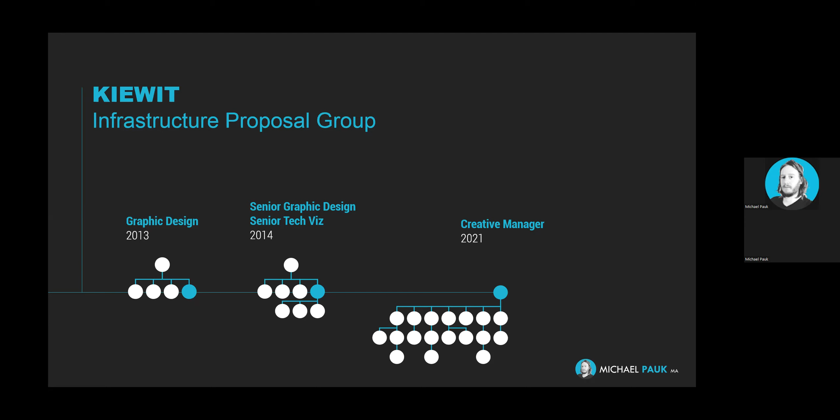And that ultimately grew to about a 16 to 20 person team. Usually it kind of fluctuated a little bit, but pretty healthy for, I would say, almost 10 years we were running this group. It's still going. But that's a little bit of my background. And this time last year, Angie reached out to me and I started contracting with her. And she asked me here to talk today, which I'm excited to do.

And we're going to focus on graphics and tech viz. But I think most of you know what graphic design is. So I'm going to focus on technical visualization, or as we came to call it, tech viz. And in my mind, that's really focused on 2D, 3D, and 4D visualizations of design and construction, which I think separates this stuff apart from what your proposal group graphic designer typically does in terms of layouts and infographics, org charts, that sort of stuff. This is more about the technical representation of the AEC space.

And I'm going to try and not get too nerdy about the technical stuff and keep it focused on proposals and presentations and marketing as per this group. So where these ideas started out, where we started selling this internally, was really what I have come to call garnish on a proposal. We were making these really slick, beautiful representations of the finished design, the finished product of what the proposal was selling. And by garnish, I mean we were really just putting it on covers, tabs, decorating, making the piece that we were submitting beautiful with the product that we're selling.

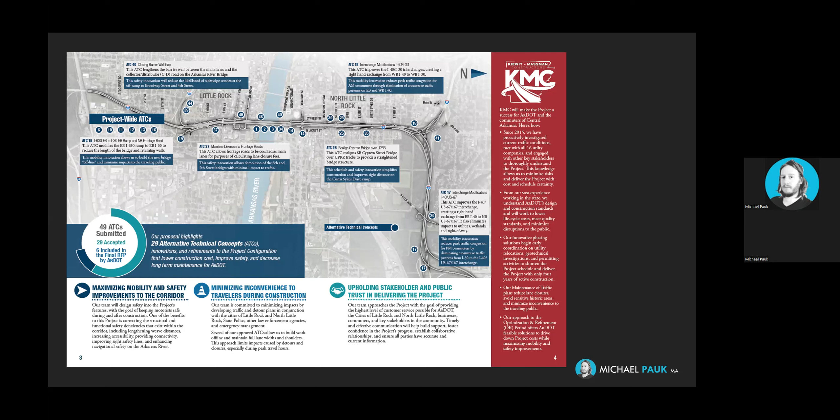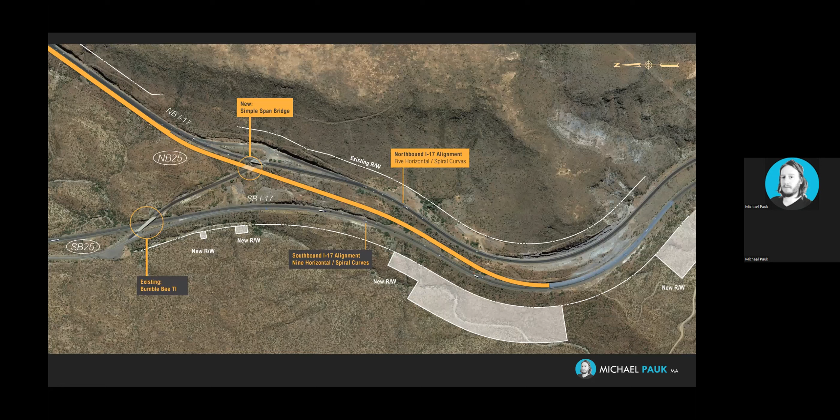And this got more sophisticated over time, where we're starting to use this stuff in executive summaries with really higher class, higher end technical drawings, as opposed to submitting your chicken scratch engineered drawings that we all see every day. Taking that a step further, we started using this tool not just as the communication of design, but also presenting options, exploring the ability to show a client that our design teams are flexible in studying projects and coming up with solutions for the client.

So here we were showing multiple design solutions for the same challenge of building this path in a really super difficult building space, a really small footprint between this cliff and a river, and showing the client what that looks like in the real world. And it doesn't always have to be super complex and big. I like to say that there's no project too big, no project too small for tech viz.

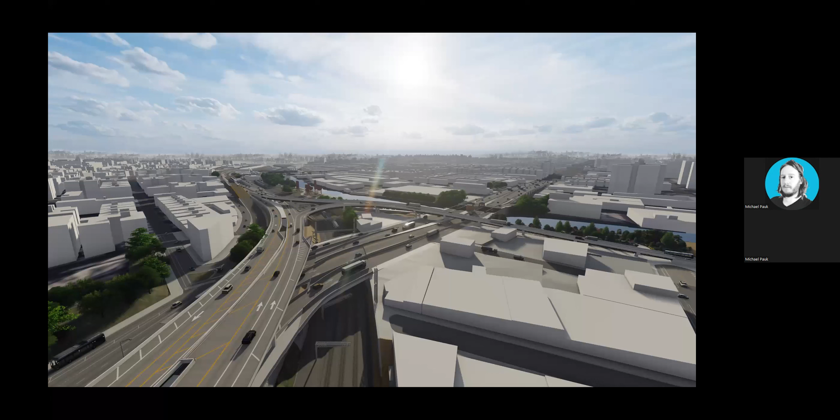If we just want to go in and show the client that we are minimizing environmental impacts on a hillside for a bike path. And then all the way to huge, heavy civil working interchanges in dense urban areas. So this whole process is super scalable. And we also started building things in 4D. This one's not 4D, but we started building animations where we can show traffic moving, what it's like to move through these finished corridors. And I apologize if video is a little choppy over Zoom, because there's a few more.

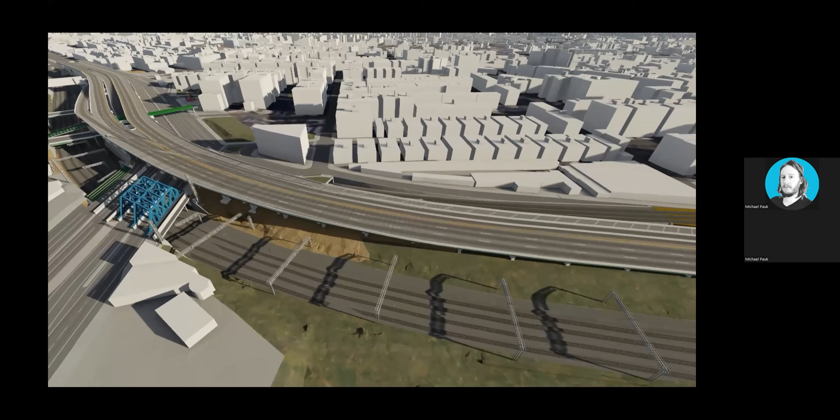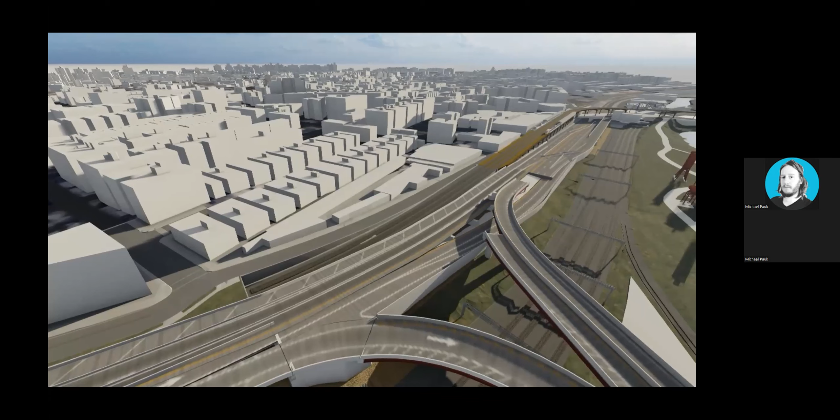So all I've really shown you so far has to do with design, and where we started to maximize our team even further, especially in the CMGC space and the design-build space, is the construction aspect, which gets us into 4D animations of how projects are built out, which requires a mindset that's super in line with your SMEs on the design side and the estimating side to really match these things up with not just the schedule for all intents and purposes, but also to show and bring out the solutions in the schedule that we can take and sell to the client.

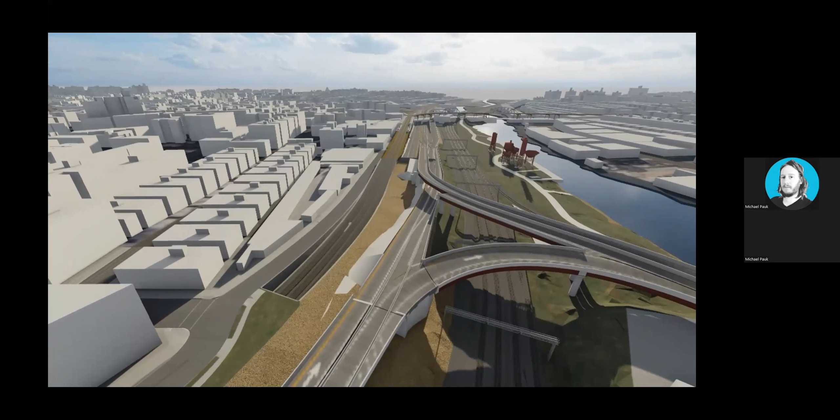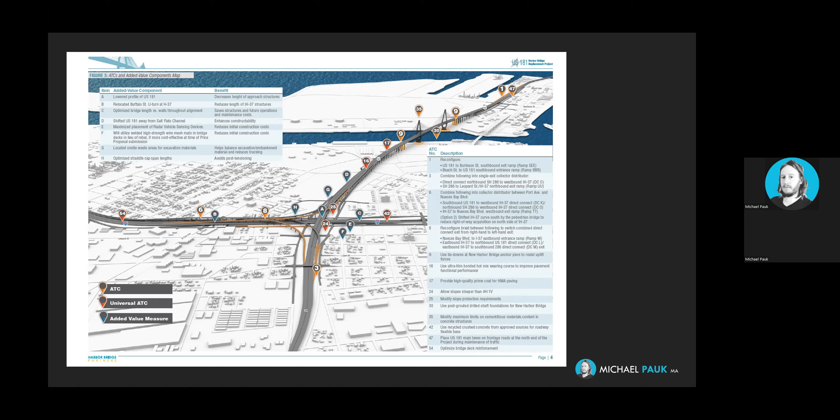And pieces like this were used in interviews and one-on-ones with the client to really communicate our solutions. So again, this graphic was showing TechViz being used to show design solutions, but in the same breath, we can use that same material to show how things are built, not only using a 4D animation, but also using them in a proposal in print media. So when I say this stuff is scalable, we also consult on what we can use, what we can do, and what we can achieve in the space for us.

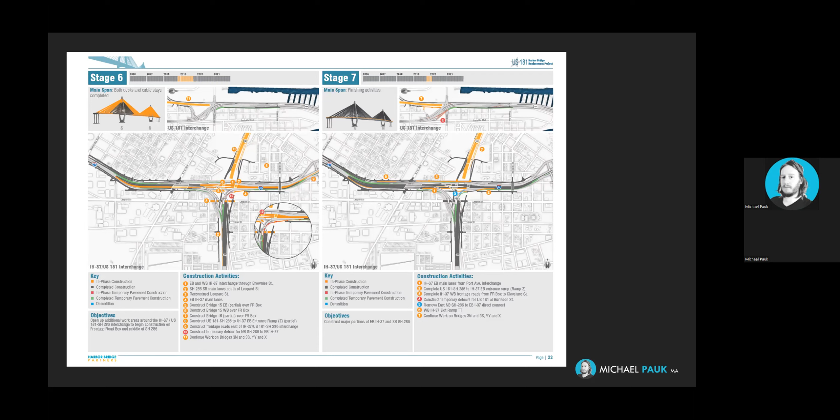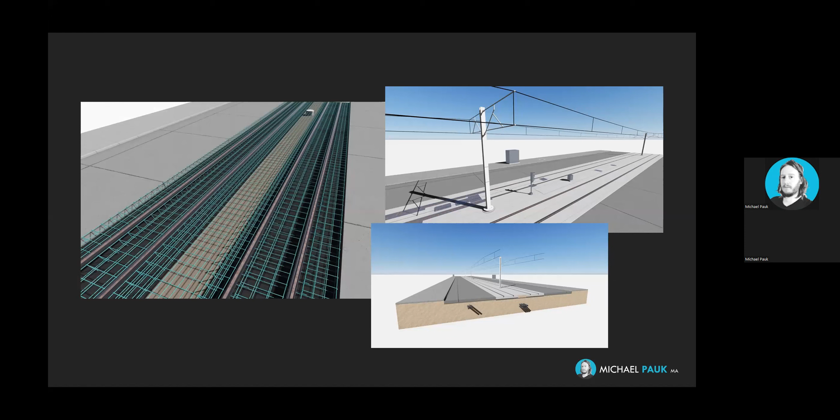We also started building models to demonstrate design components and constructability, showing pieces of projects that don't necessarily need to be in a real environment. We're just demonstrating to the client that we know how to build this, we know what components go in there, and we can walk them through every step of the job. And that builds confidence in our design teams. It helps our engineers and estimators, et cetera, really walk into an interview with confidence and have the ammunition to really sell the project.

So in terms of this group, I think there are a few people on the list I saw that are graphic designers like myself, but there's also a lot of content creators, probably looking at technical proposals. So I wanted to summarize what we look for when we go in and essentially audit a project and identify places where we can use TechViz to enhance that submission.

So on the design side, I won't get too much into these, but we're talking about, again, showing off the finished delivered project, selling project enhancements, demonstrating components and schematics and aesthetics. We started seeing about 5 or 6 years ago more and more aesthetics sections showing up in these heavy civil design-build proposals. So we started really leaning on aesthetics there, and environmental impacts are huge.

From the construction side, we start talking about delivery means and methods. Angie and I just worked on this enormous, crazy CMGC project where the win or lose on the project was demonstrating that we knew how to build this in really complex ways. So we were able to add value there.

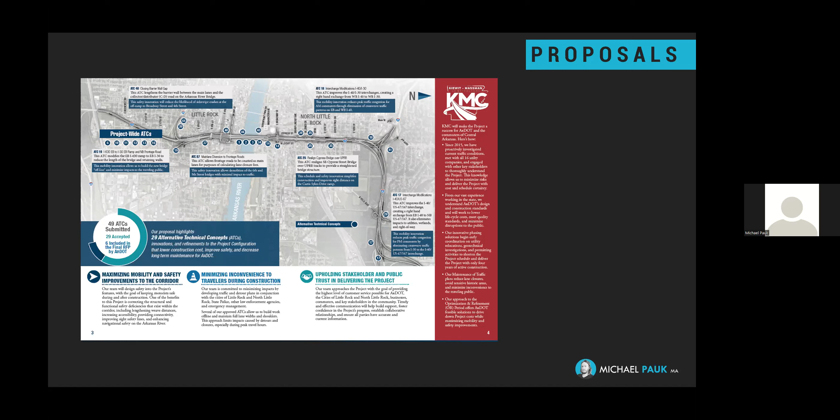But then I always like to give the reader a little bit of a break in terms of content from the heavy TechViz stuff to go back to what are your selling points, what are your messages. And this spread was then the transition into the tech proposal where we get back into tech graphics. So I also pride myself in having been working in technical proposals for 10 years and knowing what's needed.

We know how much space is needed for the write-up and how dense things can be and how we can work with the space of the print media, which is lately becoming more of a PDF digital submission, but for all intents and purposes, the space utilization is the same. And I could talk for hours on end on how to use these in a graphic.

I'm seeing what size font for this. Yeah, I don't remember. Most of the time we have an 11 or 12 point font for body text, sometimes as low as 9 on the graphics.

Sorry, I just got into that question. Where was I? Oh, all good there, Mike.

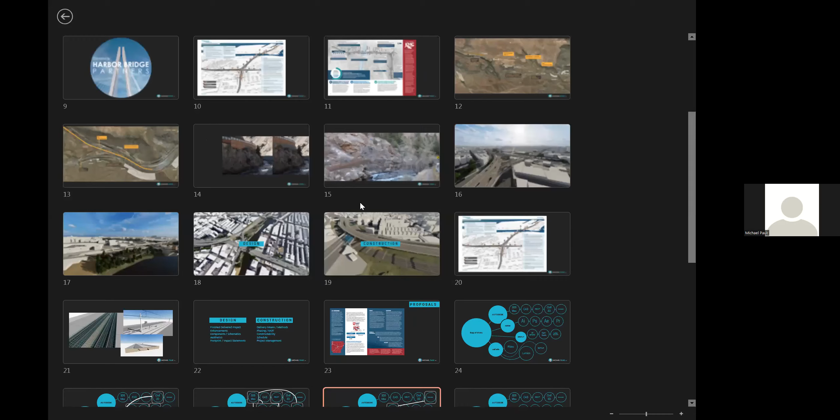I think that workflow we just talked about has a lot to do with those 2D graphics that I've shown, where it's bringing CAD into Illustrator to clean up and make it readable for a lay person to understand these technical drawings. What is your advice there, Mike, on taking these CAD files and creating 2D graphics, whether it's technical graphics, org charts, process graphics, and still making sure that people can understand them? Any thoughts on what to keep and what not to keep on these 2D visualizations?

Yeah. First thing I always say is the delete key is your best friend. Because drawing design and schematics from the engineering side, you're drawing for measurements and quantities. For instance, a graphic like this, that is not what we are demonstrating. So 90% of what I see in an engineering document or a drawing set isn't needed for the space of proposals, selling design ideas.

So delete key is your best friend. I use this analogy from Jack White from the White Stripes, who was talking about music and how he used to work as an upholsterer's apprentice. One of his main jobs was stapling upholstery in place so the upholsterer could work with it. And he would contemplate how many staples were necessary for the upholsterer to do his job, and he always tried to use as few as possible.

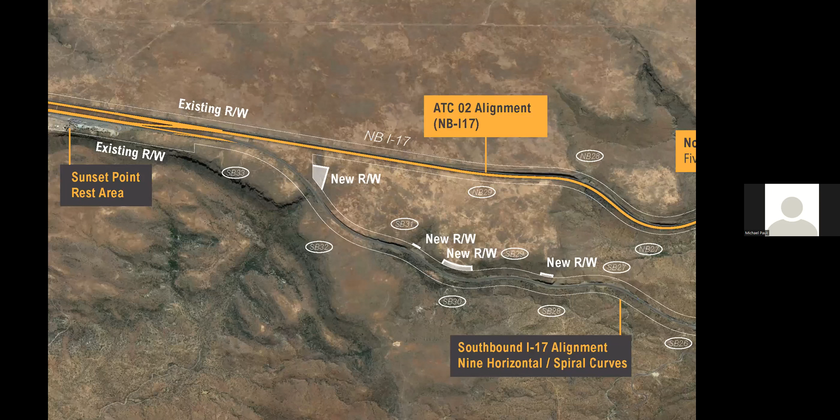So essentially what came through out of the CAD file were the right-of-way limits, which are these white lines, striping and pavement edges. This is basically a pavement project. And then tons of detail in terms of the arc of these curves, distances, mile markers, the whole 9 yards in terms of measurements.

So I took out everything that wasn't the right of way, which I think is always really important because, I'm always big on environmental impacts, it establishes the maximum footprint of a project. And if you can show that what you're building is much smaller than that maximum footprint, it makes your design team look really smart, like they are minimizing impacts.

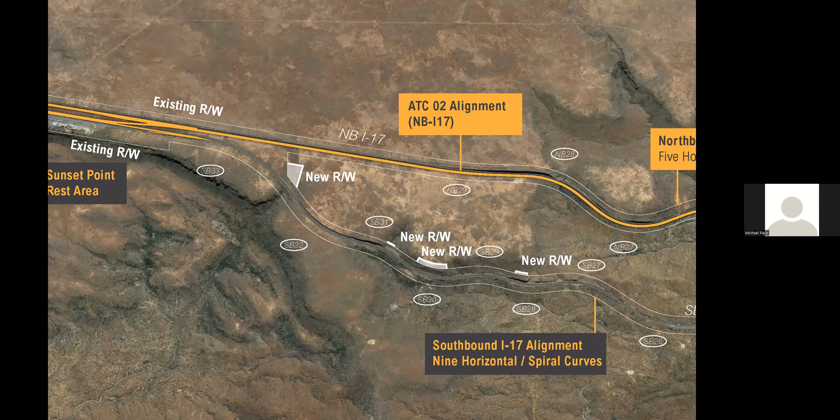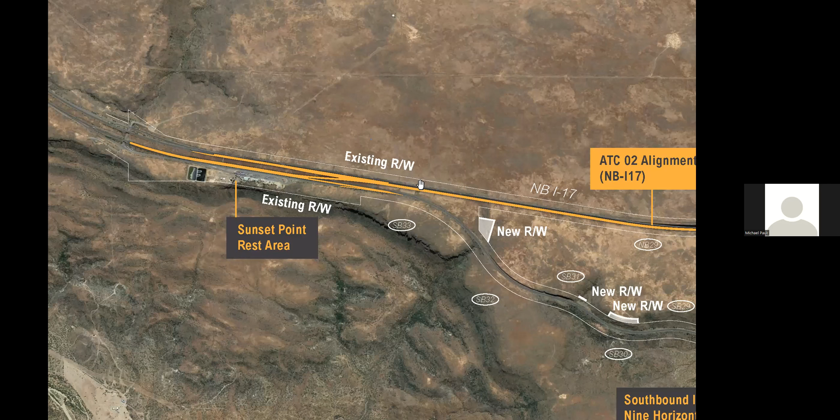So I took all that line work into Illustrator, got rid of all the measurements, things like that, and just using the pavement edge lines, joining them all together in Illustrator, so then you can make a compound shape, which is this orange, to demonstrate what is being built in this phase. And then I paint those without getting into a tremendous amount of detail. Sometimes I add a little bit, like there's a tiny bit of drop shadow in there to make it pop a little bit.

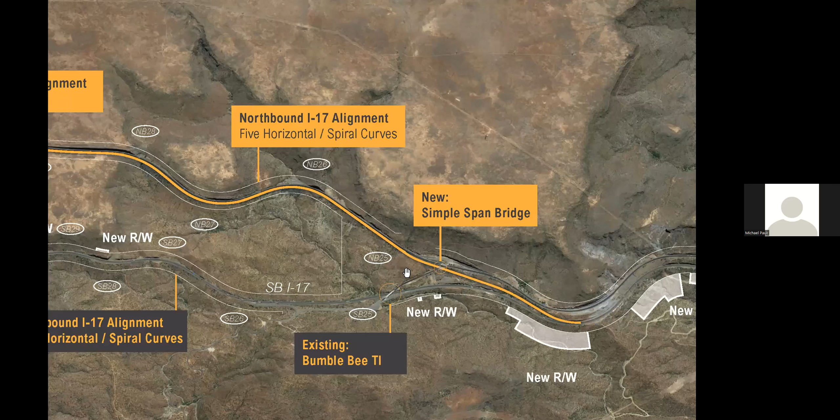I'm all about isolating one color to draw the eye. And you can see I'm using the same color in two different ways, with a dark background or the lighter background, where I want you to read the colored stuff first, the secondary color next, and the rest of the information is additive.

Part of this workflow too is pulling satellite imagery. Google Earth is king, but sometimes you can get photography elsewhere, like GIS stuff. I've pulled stuff from different states' parks and rec, government entities, stuff like that. Sometimes you have to get creative to find a good image like this.

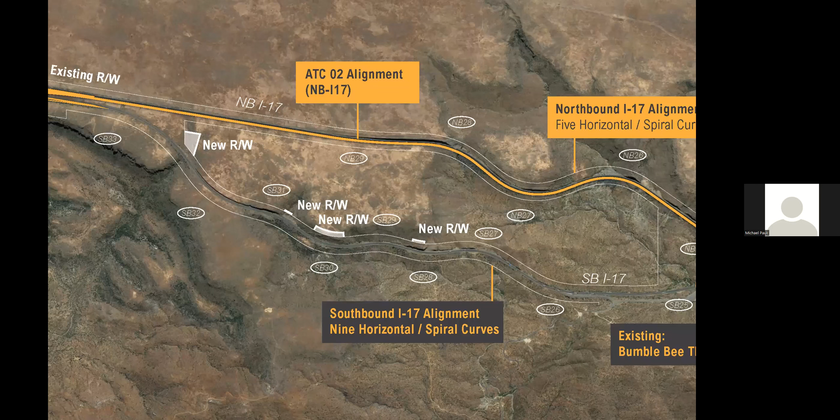And even a current one, right, Mike? Sometimes depending on where your project is, Google's satellites haven't updated their imagery. Yeah, and there's some tricks to that. Sometimes it's as simple as checking Bing, because Bing uses different satellite imagery.

Trying to think of what else I can say to that. Sometimes you don't want the most current, because stuff's been demoed or other projects are taking place. So it's always a little bit of a finesse finding the right background.

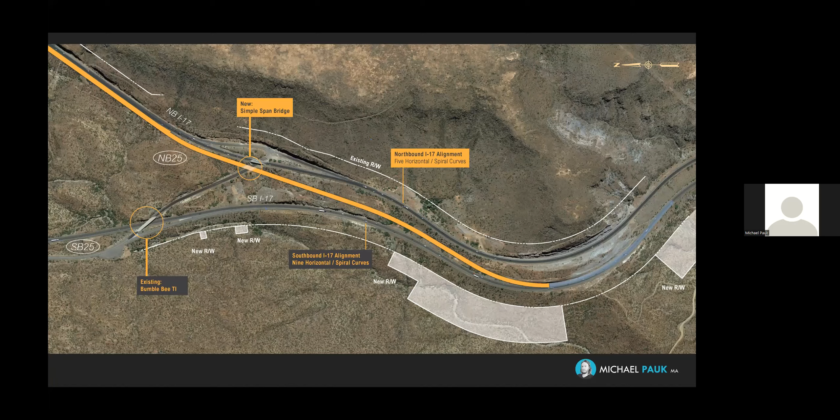Okay. Any other questions before Mike goes back? And then Veronica, we'll address your question at the end about org charts. We haven't talked about any, so I'll see what Mike can show us here. Make him scramble a little. I can scramble. Yeah.

Angie had this question for me a couple days ago about what are the skill sets, or what type of person do you need for working on stuff like this? And I used to think of what the brain of a tech viz designer is like, because I used to be the guy that interviewed and hired our tech viz designers. So short of their resume, asking what is their personal bag of tricks, because this isn't the same for everybody. Some people just do stuff in SketchUp and don't know how to use these.

But the number one thing in my mind is having a technical background. Like we both mentioned, I came up through architecture, which at the time we were still hand drawing and drafting. It was before Revit kind of took over the industry.

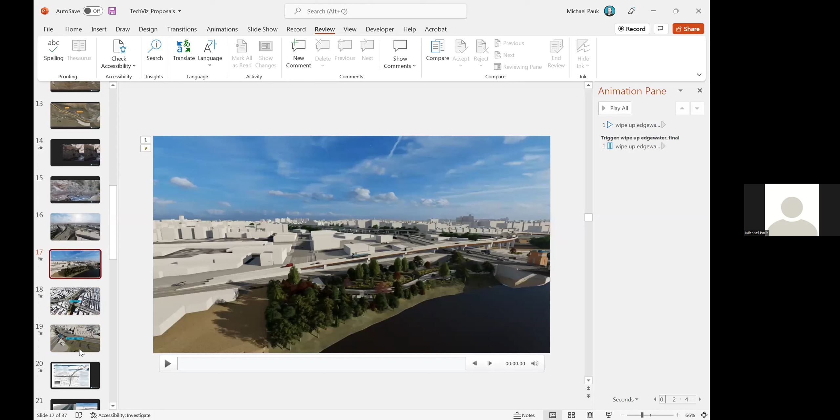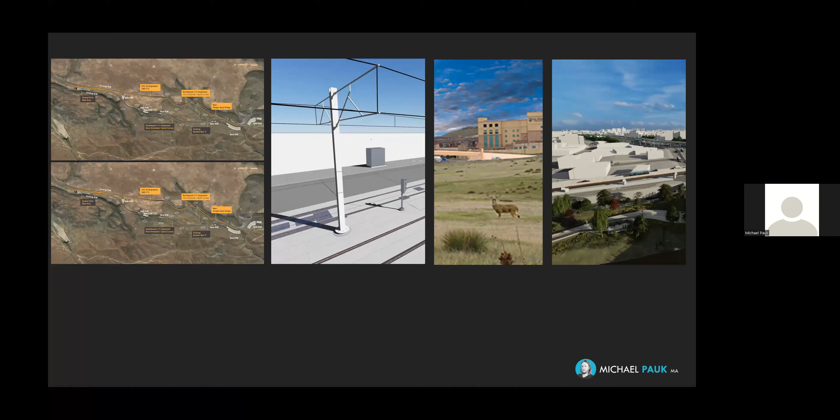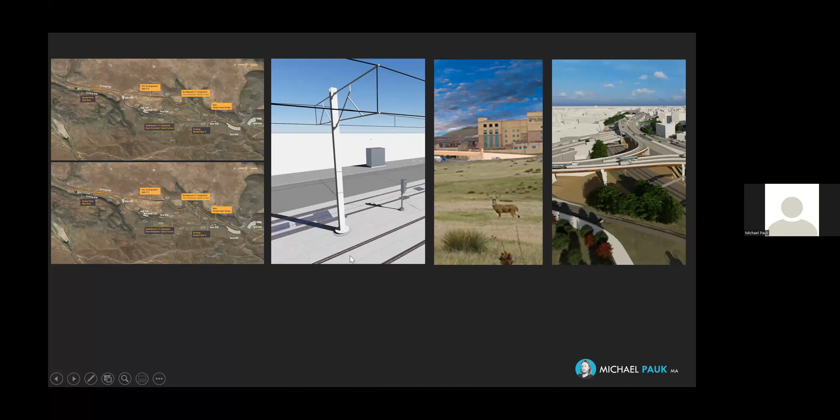But I always want to make the point that this stuff is scalable. It doesn't have to be the big giant endeavor. I pride myself in being able to find a solution within the constraints of the project and the pursuit, where if we can achieve the goal with a few maps like this, let's do it. If we can achieve the goal with some very lightly detailed models that express what the team is trying to communicate, we don't need all the glitz and glam of moving cars and animation and stuff like that.

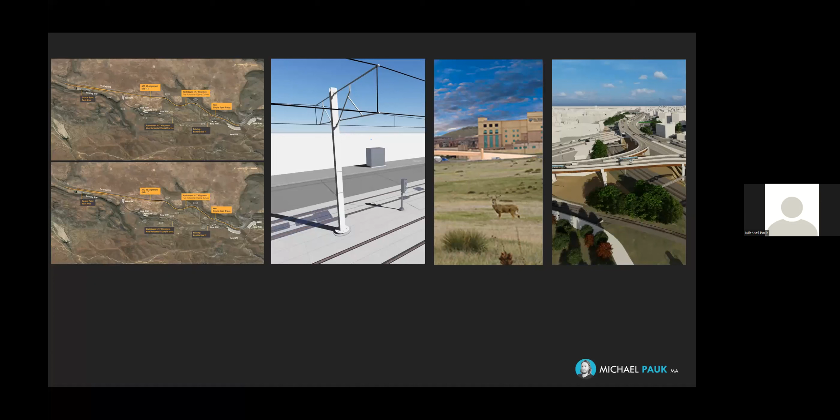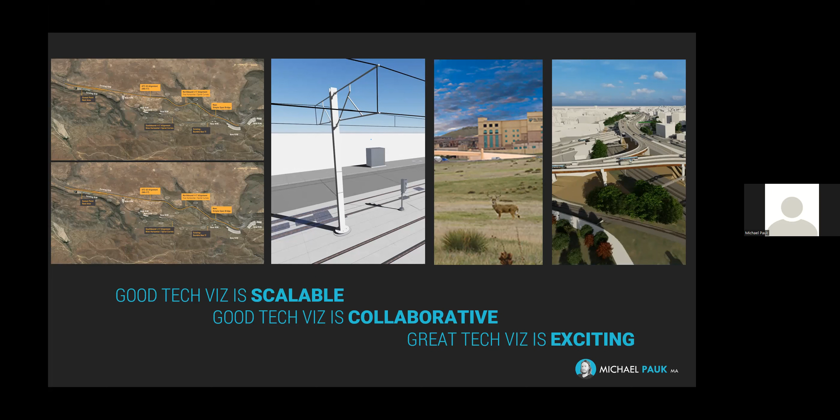So I always say that good tech viz is scalable. It's also collaborative, and the collaboration comes down from everything to how the project is achieved, but also how much time it's going to take. That's a discussion, and it's a team effort. But last, I always say great tech viz is exciting. And I think Angie can attest to that on some recent pursuits where we've seen our engineers kind of light up and in an interview environment have that much more energy and confidence in talking about what they're trying to sell. And at the end of the day, the exciting part is what allowed us to build such a big team and work so comprehensively in the infrastructure space.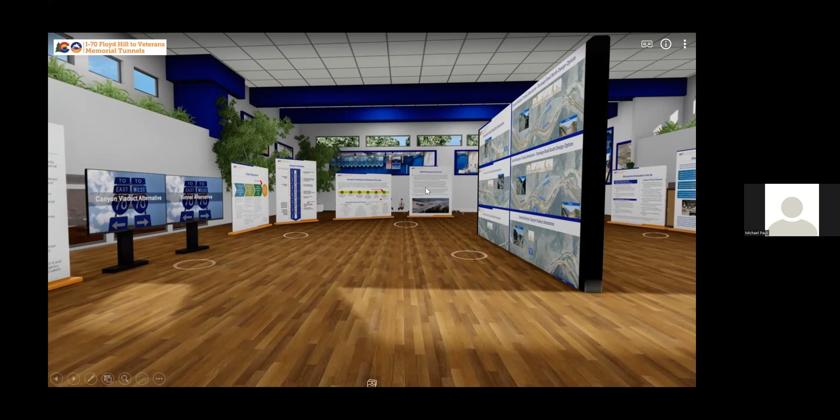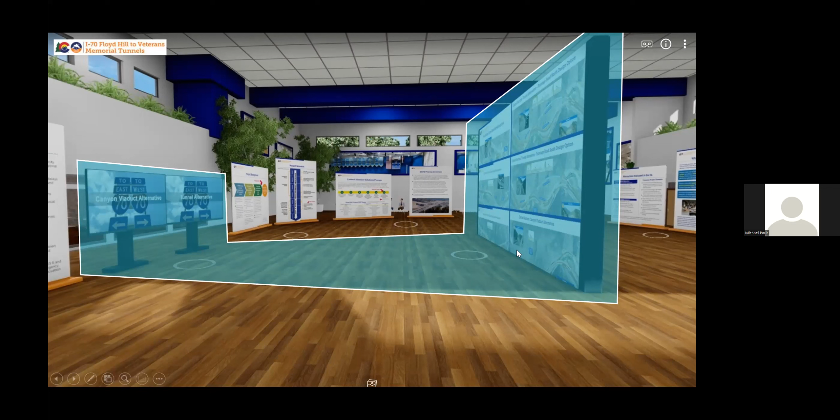You get met by this receptionist in a 3D space that teaches you how to move around this virtual space, sort of like an art gallery that you can click through on their website. And it has stuff like PI pieces, infographics, background information on the corridor. But I'd like to point out that all this stuff in the middle is TechViz. This whole giant wall that you can click on and look at is the exact kind of stuff that we were just talking about, where it's sophisticated, clear, and presentable 2D diagrams of what the project is, paired with 3D to really speak not just between engineers and engineers, which a lot of the times that's what proposal work is, but this is public facing.

And they have 3D videos in there that are virtually the same thing that we were doing 5 years ago on the Kiewit side. So this stuff is becoming the language of our clients, essentially, that we're selling to. And I told Angie this the other day, one of the best ways to talk about TechViz is if the owner is already speaking this language, you need to be speaking it back to them. Because that panel that your interview team is talking to has seen this PI piece that CDOT has already paid for and built. So if you can sell your idea of how this project's built using the same language that they are, you have that much more clear and presentable of a sell.

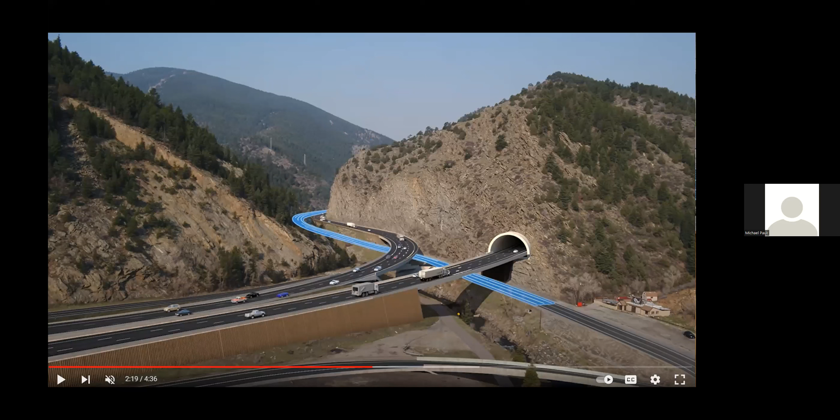So yeah, that was sort of my last deal. I don't know if this kind of strange looking receptionist really is the future. I think it's got a long way to go to become more sophisticated. We've all seen what Facebook is trying to do with the metaverse, pretty similar to this. I think some of it has traction, some of it doesn't. But what for sure does is this type of communication.

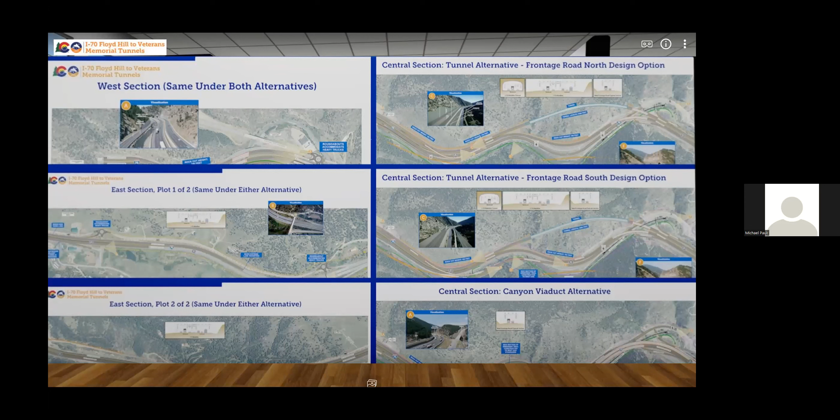Yeah, and with that, we can jump back and talk about some of these questions. Perfect. Okay. So we have about 5 minutes, Mike, before 1. So we'll get through most of them.

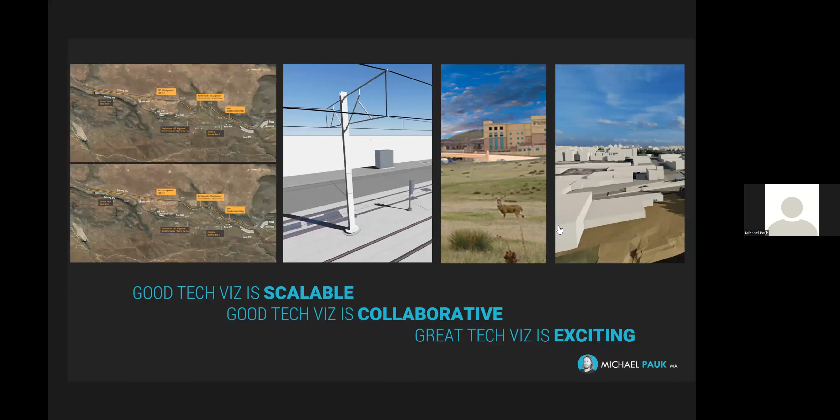the whole piece. So sure. Do you have advice on kind of which ones provide the most value, how to pick and choose which graphics are best to put some effort in, and what effort does that look like to get the most bang for the buck? Where to start?

So first thing I'll say to that is a best practice that we developed early at Kiewit, and Angie can attest to this: when I first started, your graphic designer was really just an inbox of graphics requests, and you turn it around and give it back to the team. And there wasn't a lot of collaboration or interfacing between the team as a whole, or even an understanding of what the end goal was or what the total product that the team was looking for was.

So I always say, get your creatives in the room early. You mentioned that there's a lot of people out there working in this space that are the content developers from cradle to grave, which is great, because to have a discussion about LOE and what is going to be the solution for your pursuit, that person needs to understand at a comprehensive level what the end goal is. So if you're wearing multiple hats, that's great. You already have that comprehensive understanding, and it has to do with how much space is allotted in the submission or presentation or whatever piece it is you're working on.

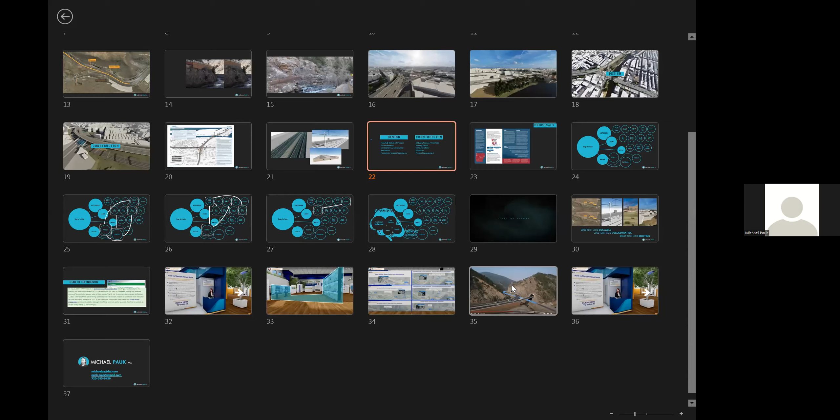That said, the LOE conversation, I like to use the term measured mile. We use that term a lot in dispute resolution, where we say, but for any problems, this type of thing takes this long to deliver. And without getting into a ton of detail on this, I do have what I call that measured mile for different types of graphics like this, where a graphic like this maybe takes 10 hours with another 5 tacked on for iterations and collaboration, where this one's probably a 40 to 60, this one's probably also 40 to 60, again, that 60-hour effort.

And so it's good to catalog and understand how much time goes into each iteration of these. And that changes per group, because some groups collaborate differently than others. Angie and I have 10 years worth of trust, where she can say, I need this, and I know what she wants, and there's not a lot of back and forth, but that's not true for every working relationship. What else can I say about that?

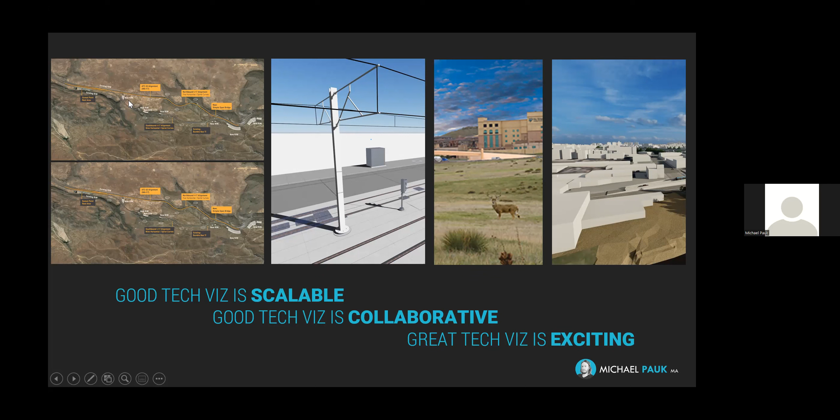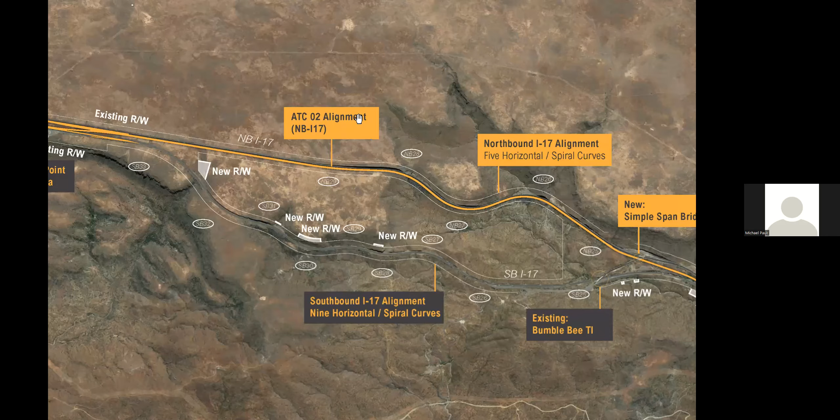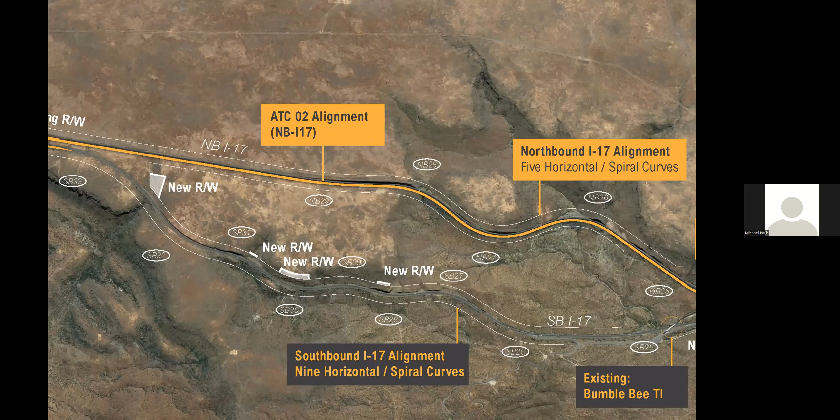I didn't put any org charts in here, but I built these flags pretty similar to how I build an org chart, where I am minimizing noise to the pieces that pop because of their color and typography. When I say typography, I mean where I have font changes and things like that. Right. And especially recently, I've been leaning on that very hard with digital submissions to really enhance how you read a graphic and how interesting it is.

Okay, I think we have one question left. If anybody has any question and wants to come off mute and ask Mike, feel free to do so. He doesn't bite or bark. And the chickens, I don't think, will get too mad at us.

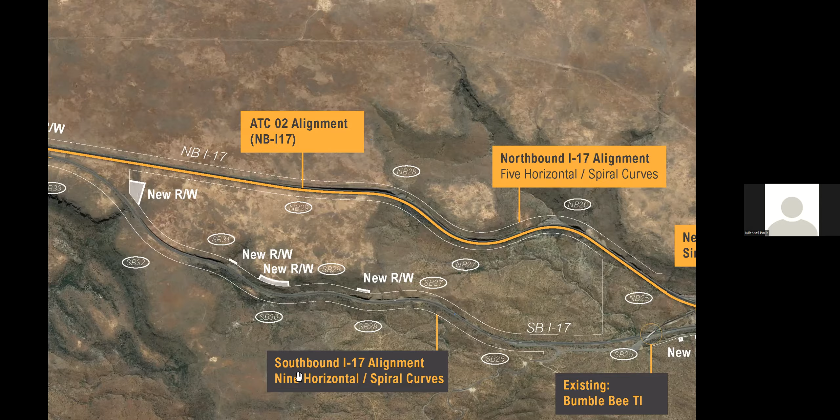I know Ayumi had a technical question, Mike, on how do you match the angles and skews of your aerials with your CAD drawings? Use Photoshop, or how do you do that? So again, this comes back to that workflow diagram where there are multiple ways to accomplish that. Both Rhino and 3ds Max have built-in tools for perspective matching, which is how you accomplish something like, where am I? Like these,

where I have just photography that we took on the job site, and I built these models and then used the perspective matching in Rhino to get it to fit where it needed to, which is really, really easy to do if you're doing interior design and you're trying to get a table to match the perspective of a picture of your living room. But a photo like this is pretty tricky. There are no straight lines to really use to create the perspective.

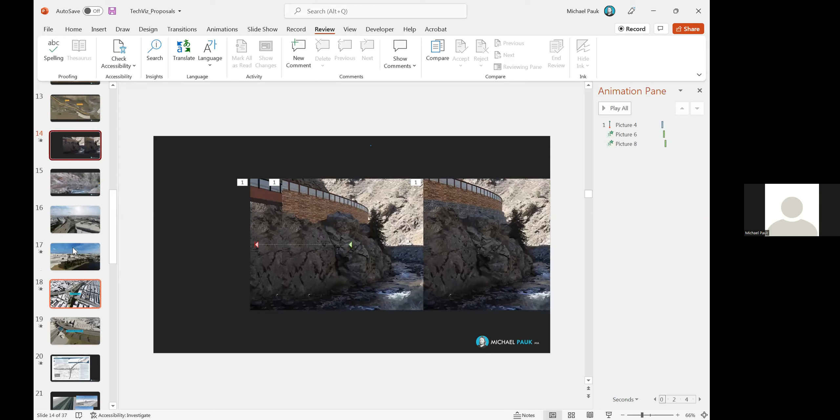So you have to use your imagination a little bit, which for me comes from the all-nighters in architecture school and undergrad, having to hand draw perspective drawings using a drafting table and rulers. For things like this, trying to think of my workflow here, I will pick 2 points on the map that I can scale everything to. And for those proficient enough in Illustrator to know what a clipping mask is,

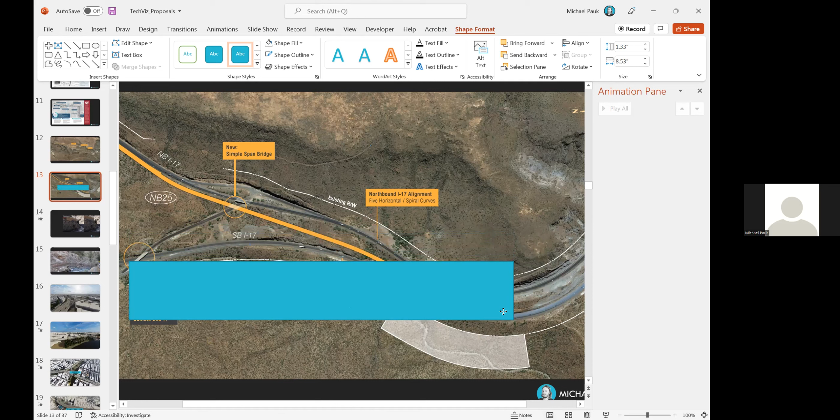I will draw a clipping mask over my line work. Let's say I'm going to draw a little fake clipping mask. I'll grab this extent of that bridge to, let's say, the end of this curve. I'll clip everything under that, say my artwork's over there. Then I can drag it to those spots and scale it to fit, and then I'll release the clipping mask. That probably won't make sense to everybody, but it probably does to Ayumi. She's done that a few times, I bet. Yeah, that's my trick.

Other questions for Mike? Graphics, proposals, anything else? Any other tips and tricks that you use? I know Rick's on. There's a few other 3D, 2D folks on here.

Anything else? No, and to those people I say, if I said something in this presentation that's a different way of doing things than you, I love hearing how other people accomplish stuff. I truly believe that at least the graphic communication world is a community, and that we all get smarter by communicating with each other and growing that way. That's my soapbox. I didn't communicate that very well, but

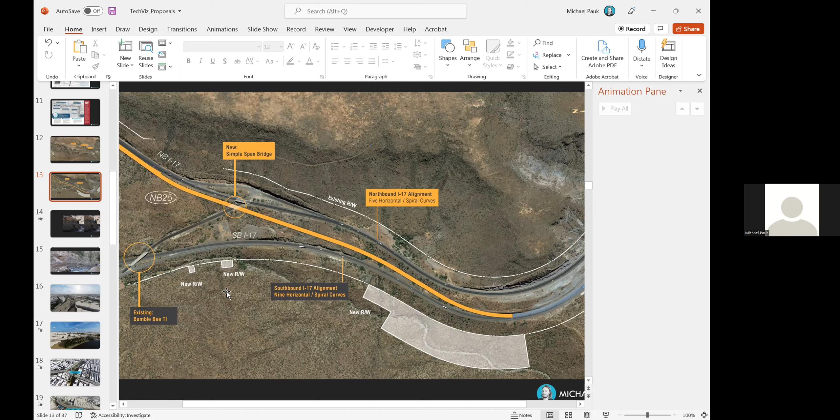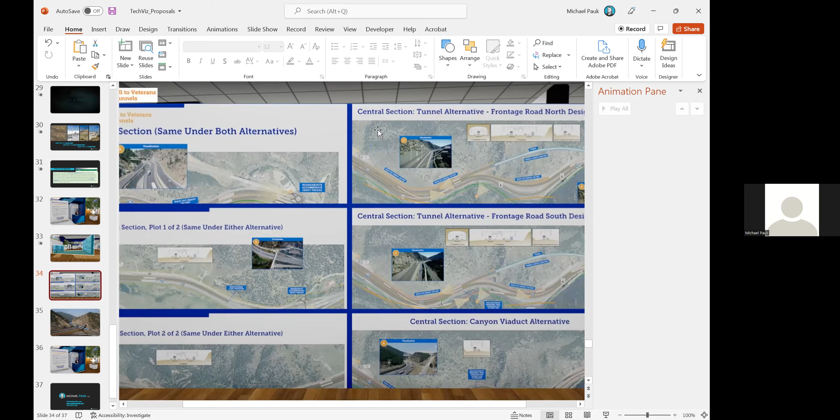Yep. Last question from David. What's your advice on positioning aerial photos? Is north always to the left, or how do you position? Especially as a creative director, north points north, and you need a very good reason to have an exception to that rule. One exception is if the client drawings are oriented a certain direction to match the way that the client is using their drawings. For instance, those CDOT drawings, I think north is at a diagonal here, but we matched their directionality.

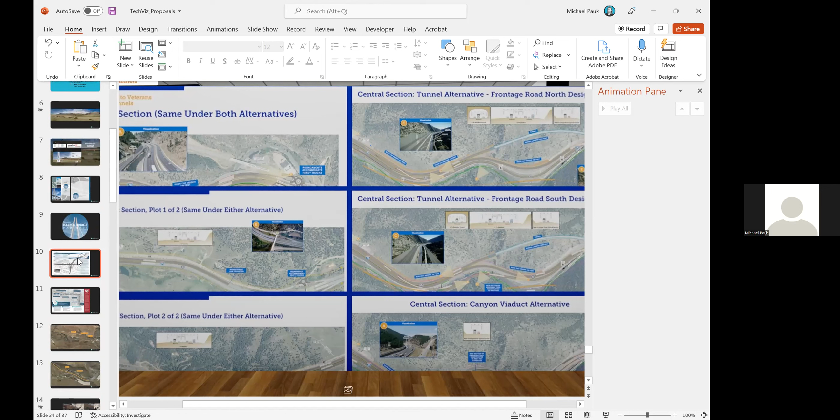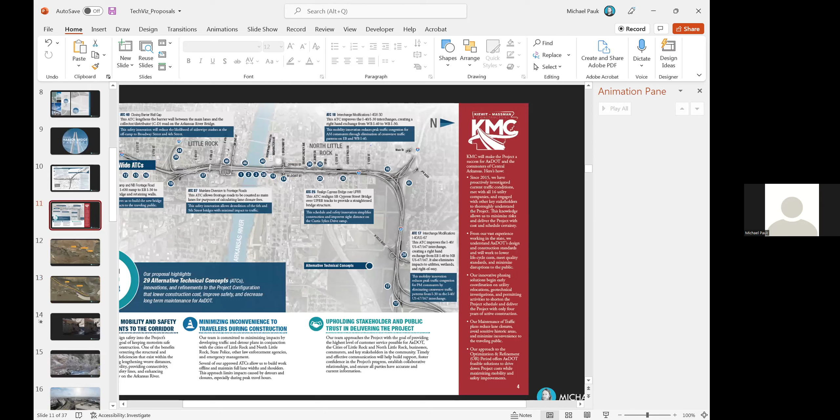The only other exception that I will sneak into proposals is... struggling to operate PowerPoint with the Zoom meeting stuff all over my screen. That's not the right page.

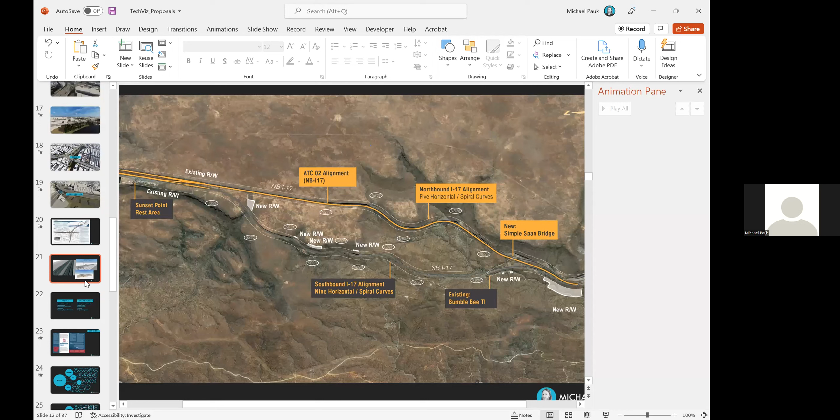Sometimes it just comes down to layout on a project, especially in print media. This, for instance, is such a jam-packed 11 by 17, and this project has this wonky dog leg to it where north is going right here. If you change the orientation where north is up, one, it would be difficult to fit on this page with all this content, but two, I'm using the long edge of the page to maximize the scale of this drawing.

What I mean by that is if you turned it on its side so that north was up, you would lose that length and your drawing would be smaller. Or you'd have to chop it up. So there are exceptions to the rule, but north goes up.